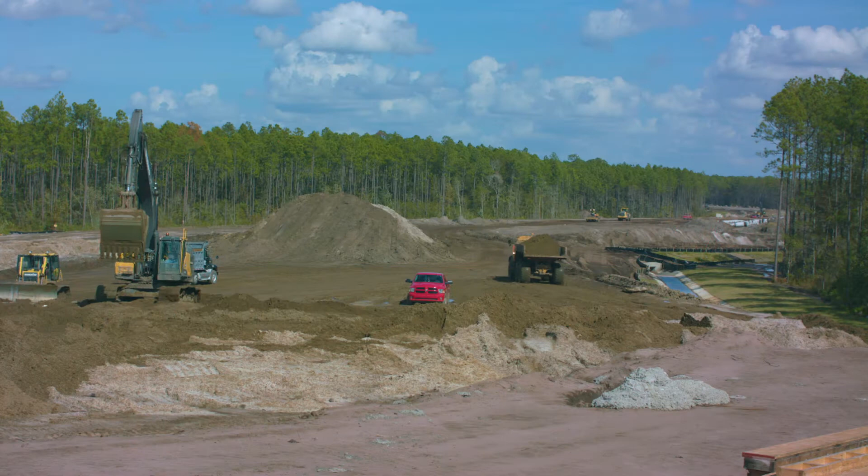By the time you're done watching this video, another 60 to 100 people in North America will have sustained an injury while on a construction site. Please pay attention and join us in keeping safety at Superior Number 1.

The Superior Construction family has worked hard to achieve our collective reputation. We're known for service, quality, and safety since 1938. Our commitment to safety is reflected in our safety performance. Despite our success in this area, we are intent on achieving our goal of zero incidents. Nobody wants to get injured, and most of the time we make good decisions, safe decisions. We take the time to plan the work and follow the rules. But sometimes we think we must rush the job or skip a step, and our behavior becomes risky.

Hello, my name is Nick Largura, 4th generation owner and Chief Executive Officer of Superior Construction. Everything we do, whatever your work involves, no one should ever get hurt. Our safety goal is zero incidents. Even one incident is too many.

Cultivated with more than 80 years of experience, our safety program helps provide the practices and procedures to help create a safe work environment for you and those around you. Safety is the job of each person working on behalf of Superior Construction. Together, with your commitment, we can help ensure that we all go home to our families safely. We must all work hard to achieve zero incidents.

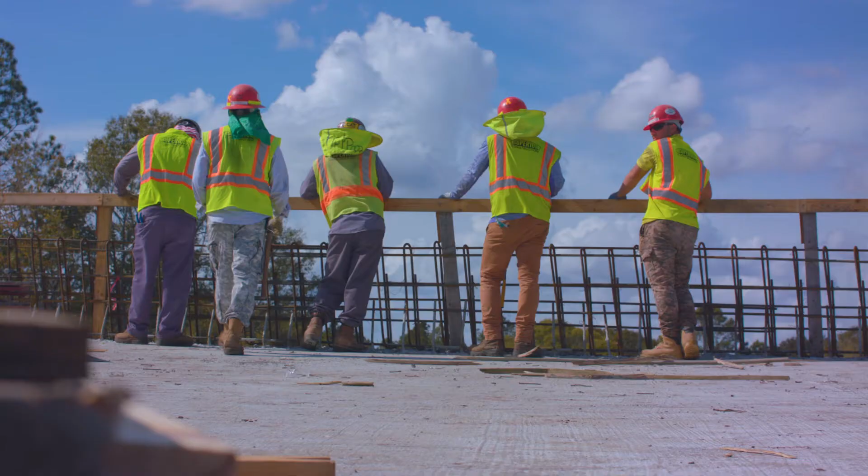Careful planning of your tasks is essential. But the most difficult part of incident prevention is making decisions protecting you and your fellow workers from harm. As your employer, we must comply with all safety regulations. We must maintain a safe and healthy workplace by identifying and controlling hazards and executing a well-documented HSE program.

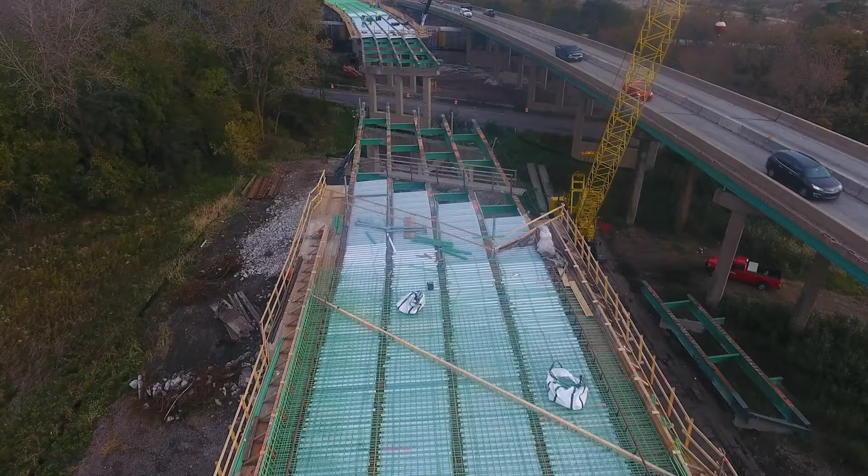As employees, you must comply with our HSE policies as dictated by legislation. You must always work safely, and you must report any unsafe acts or conditions so we can take corrective measures. We want you to know at Superior, safety is a core value, and it's everyone's responsibility. We have clear and specific HSE requirements you and your coworkers are expected to follow.

In this orientation session, you'll learn more about what you can expect and what's expected of you. If you have questions, we want you to feel comfortable speaking with one of our HSE professionals you see on site or your supervisor.

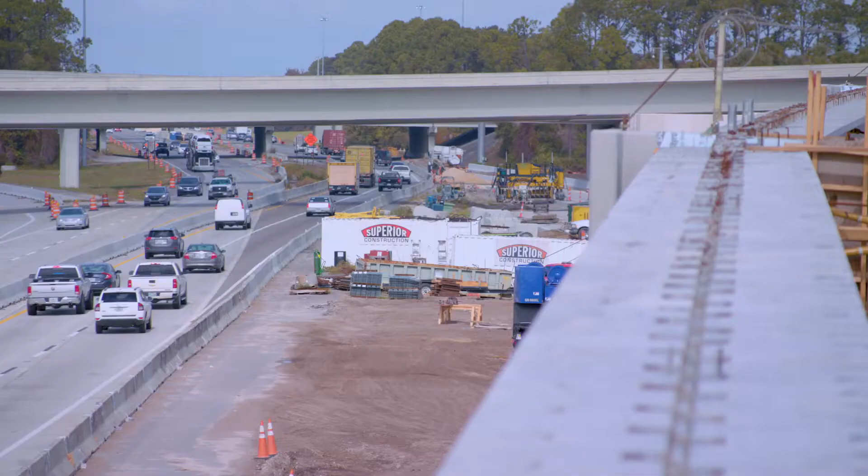As part of this orientation, we want to provide you with insight into our safety culture. It isn't a separate culture. It is the foundation of everything we do. Throughout your career with us, we want you to live our safety vision to make safety a part of your day-to-day interaction at work and home.

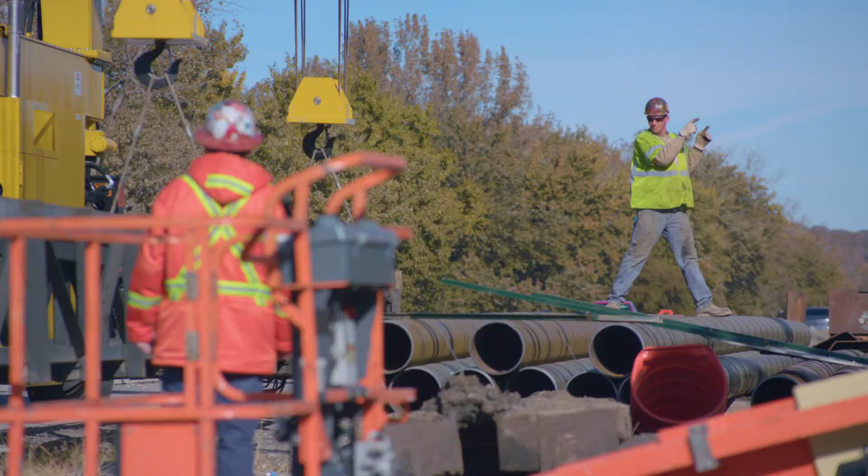We know there's a lot to learn about our safety program. To help you better, we've developed the Employee HSE Handbook. If you have a question about our safety policies or want to better understand our safety expectations, you'll find the answers in its pages. You're required to familiarize yourself with the handbook, then sign and return the acknowledgement sheet to your supervisor.

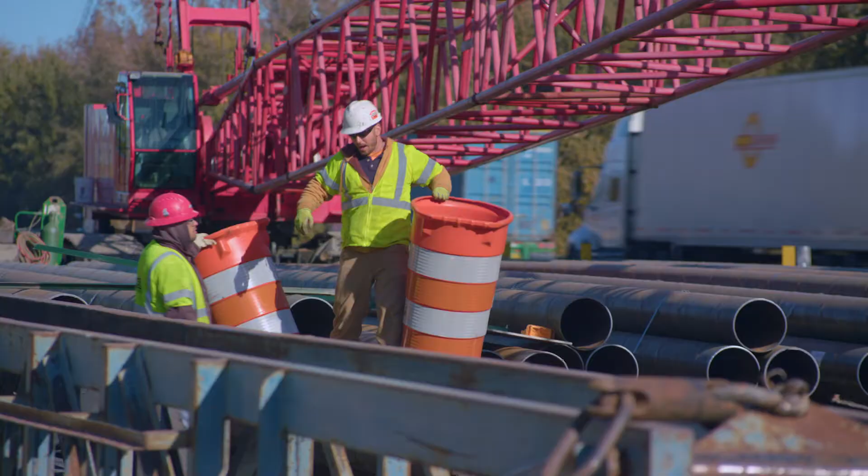All our safety resources are documented and are available to you in paper format at the job site or in electronic format. Some of these important documents include our corporate HSE vision statement, fall protection policy, HSE manual, and our HSE OPs. If you're in doubt about a safety practice, you can look it up in the handbook or consult your supervisor.

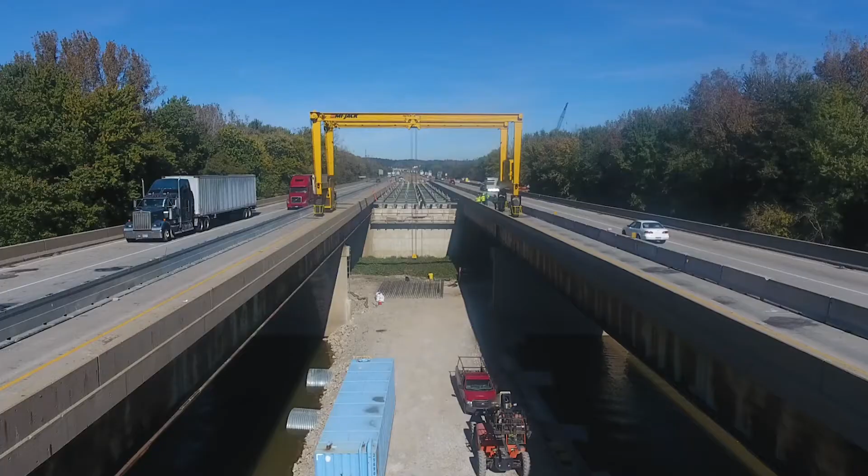Every employee has the right, even the obligation, to refuse a task if they think the task will place them in harm's way or is unsafe. Remember the first thing we talked about? Our expectation of zero incidents. If you think we don't have the right equipment, tools, or hazard controls planned into the task, stop and talk it over with your supervisor. Get the right stuff together and do the job safely. And don't forget to redo the THA to show the changes that were made to make the work safe.

In addition to Superior and our clients' policies, all governmental regulations must be followed. You can find these rules in the job site office. Workers must plan their work and comply with Superior, client, and governmental HSE standards.

If you or another employee don't follow the safety rules, disciplinary actions will be taken. That discipline may involve a verbal or written reprimand or removal from the job site, either temporarily or permanently. Superior reserves the right to terminate any employee on a single HSE infraction, with or without prior notice. Safety isn't optional. It is a condition of your employment.

Certain misconduct is designated as zero tolerance because it is so serious and potentially dangerous. The following violations are grounds for immediate termination: any criminal or illegal activities on the job site, possession and/or use of any illegal drugs or alcohol on the job site, possession of firearms or other weapons, any physical fighting or other acts of workplace violence, theft or attempted theft of property of any value, or vandalism.

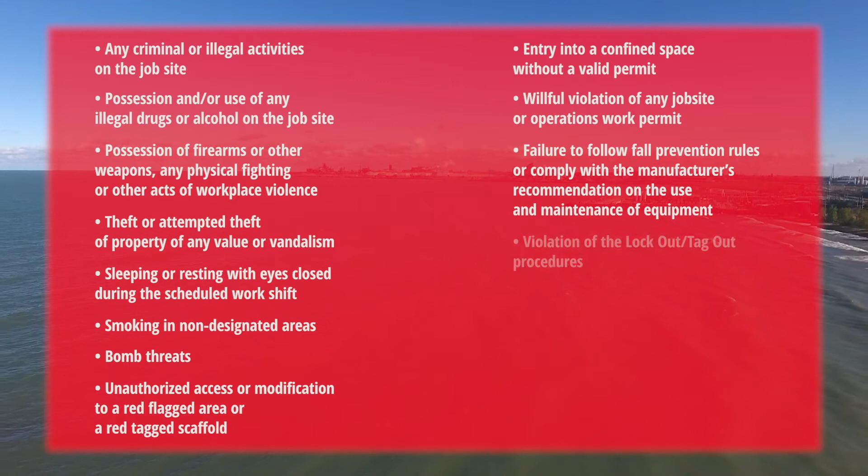Sleeping or resting with eyes closed during the scheduled work shift, smoking in non-designated areas, bomb threats, unauthorized access or modification to a red-flagged area or a red-tagged scaffold, entry into a confined space without a valid permit, willful violation of any job site or operations work permit, failure to follow fall prevention rules or comply with the manufacturer's recommendations on the use and maintenance of equipment, violation of lockout/tagout procedures, tampering with fire prevention equipment or client plant equipment, operating equipment without proper authority or qualifications, and failure to use sanitary facilities.

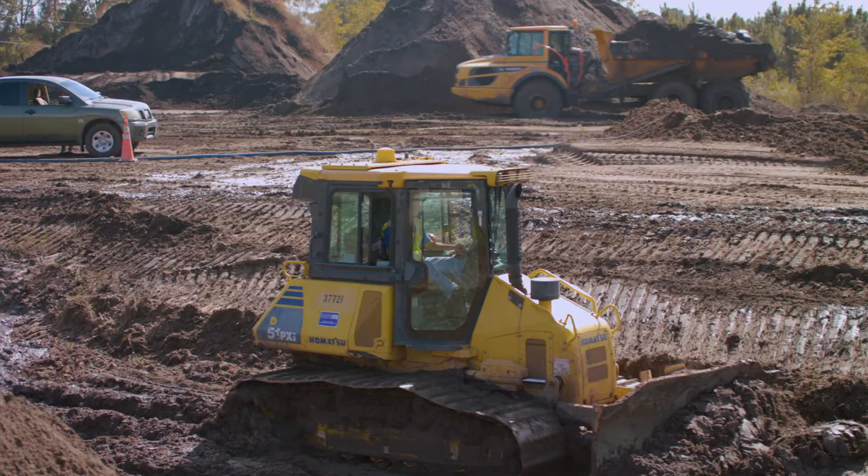Our substance abuse policy states the possession and use of illegal drugs and the misuse of legal drugs and controlled substances can have a serious impact on safety and will not be tolerated. Superior has zero tolerance for any use of illegal drugs and alcohol on our job sites. Also, you must use care when taking prescription drugs, as some could cause impairment. Please respect our rights in this regard and the rights of your colleagues to work in a safe and drug-free environment.

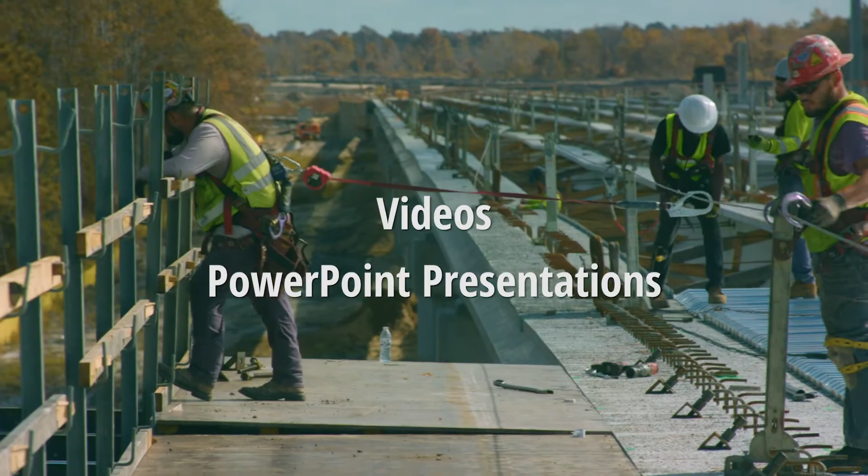We consider you to be an invaluable resource because you have first-hand knowledge of what's happening on a project. We want your feedback to improve our program. We conduct training wherever and whenever we need to. It can take place at the job site or in our local office, at the start of the day or at the end of the day. To conduct our training, we draw on several resources including videos and PowerPoint presentations. More importantly though, we rely on our own hands-on experience to bring the importance of safety home to you.

Our HSE field meetings are critical to the success of our safety plan. At Superior, you'll be required to attend weekly HSE meetings. On some job sites, daily HSE meetings are held. If for some reason you miss an HSE meeting, you'll need to review the content with your supervisor.

Being ready to work safe is more than just showing up on time and attending a safety meeting. It's also being physically ready to work. You need to warm your body up with stretching so you can reduce strains and sprains. Stretching prior to getting your day started is very important.

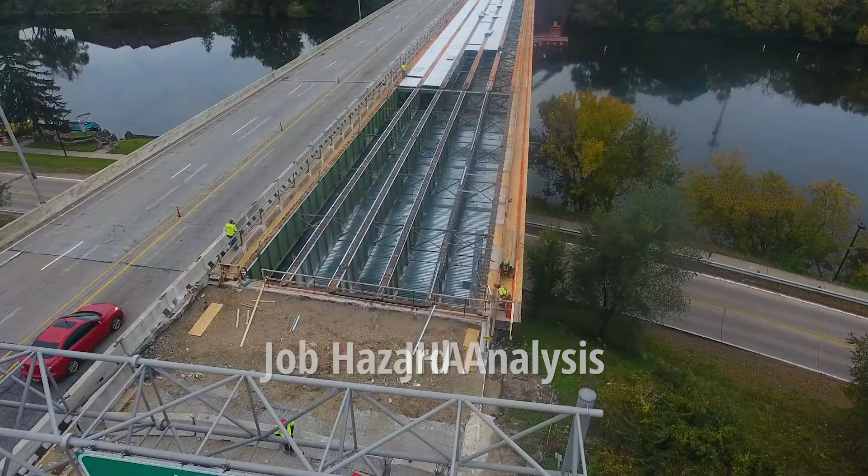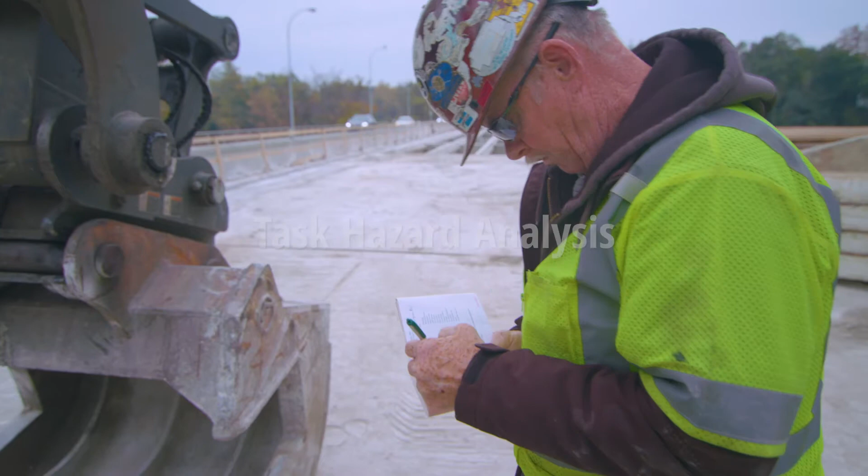On every Superior job site, we prepare a job hazard analysis, or JHA, to determine the risks of specific work tasks and take actions to modify the work or provide protective mechanisms reducing the risk. You, your coworkers, and supervisor must review and sign off on every JHA pertaining to your work and use it as a reference to do the task safely. Before you join your crew and begin work, meet with your foreman or supervisor and complete a task hazard analysis for your job.

Task hazard analysis, commonly referred to as THA, is a mandatory program designed to identify and control the hazards associated with job-related activities. Here's a THA book. The THA is an important activity because it helps you verify the working conditions. The THA is a pre-task planning tool designed to increase productivity and decrease the possibility of an incident. A THA can be conducted by a supervisor, designated work crews, crew members, and employees. The THA will help to recognize, eliminate, and control potential hazards.

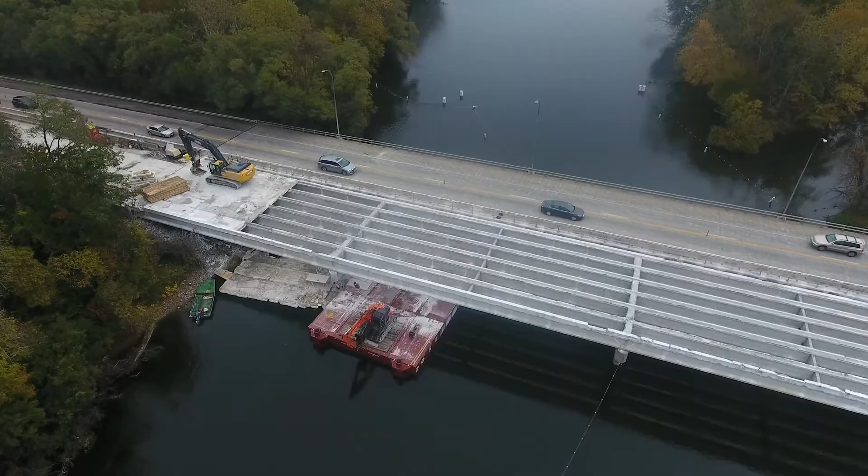Each worker must sign their THA when it's completed. Each crew must also complete a THA at the start of each shift, prior to any new job tasks, when new workers are assigned, when the information about the job changes, or when any job conditions change. The THA should be conducted in the location where the work will be performed. That way you can better assess the hazards and the controls.

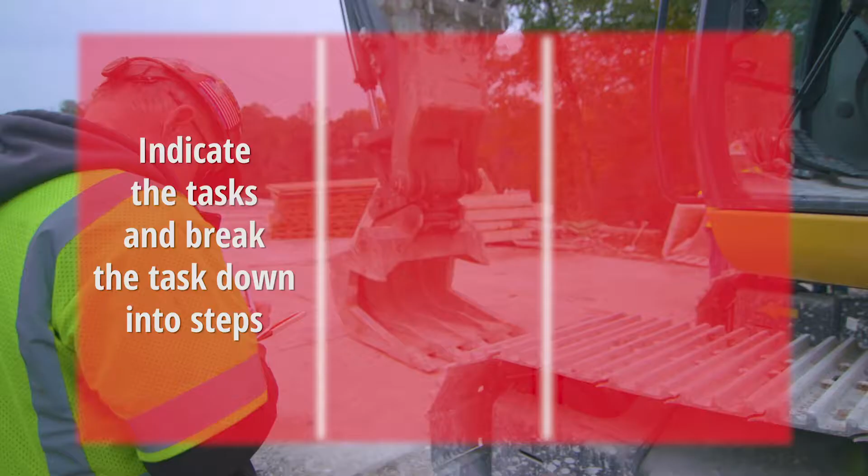Check off applicable hazards and other information as necessary. We only plan for one task per THA. If there's more than one task, do a THA for each task. Indicate the tasks and break the task down into steps in the first column. List the hazards in each step that could hurt you or a crew member in the second column. List the hazard controls to help prevent incidents in the third column.

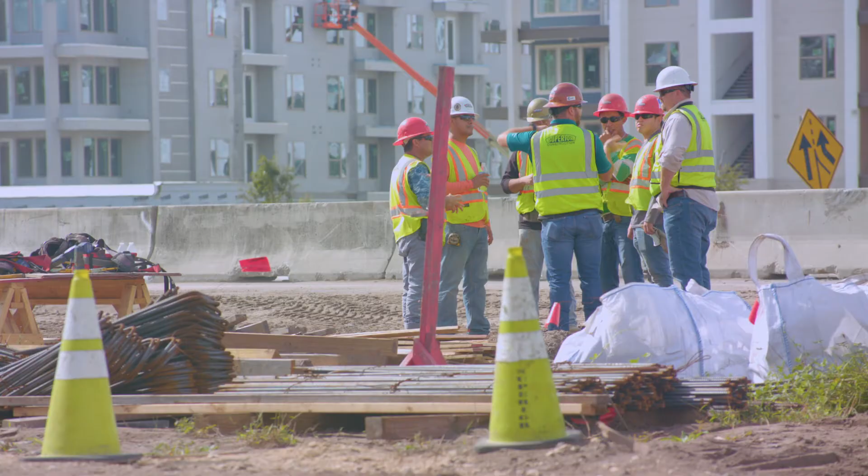All workers print and sign their names. Look around if other crews are doing work in the same area. Share your THA with those workers and look at their THA too. Review the THA after breaks and after lunch. The supervisor of the crew or superintendent signs off on the bottom of the THA.

A large measure of our regulatory responsibility in terms of safety lies in environmental protection. Consequently, the aim of our environmental policy is to minimize hazards to public health, protect the environment from the adverse effects of construction operations, comply with all legislated standards and regulations, assess potential environmental risks, evaluate and monitor environmental performance to applicable standards, work with industry, governments, and workers to enhance environmental awareness and maintain effective reporting.

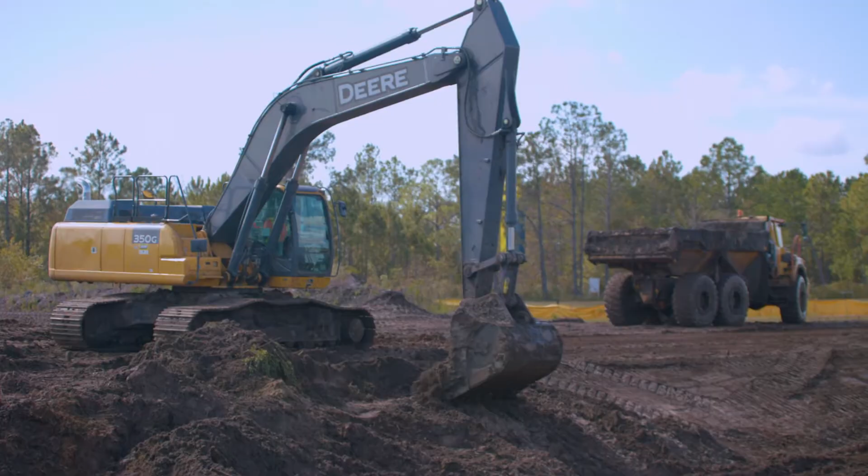The project-specific HSE plan will have specific procedures to help meet government requirements to limit our impact on the environment, including procedures for handling chemical spills, procedures to control erosion from job site rainwater runoff, as well as dust control and procedures for handling contaminated soil or groundwater. We expect all our employees to treat the environment with respect for the safety of our generation and for generations to follow.

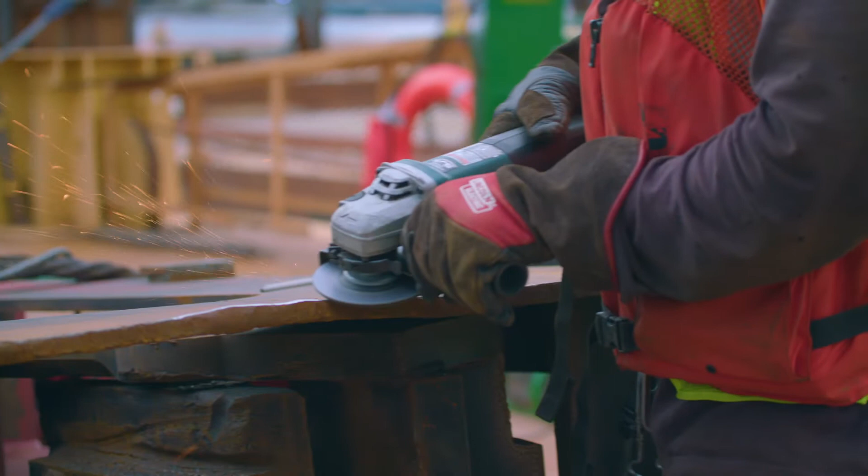While we make every effort to work safely, inevitably objects do fall and fly. Grinding, sawing, concrete chipping, chemical mixing, welding, and burning are a fact of life in the construction industry. Please do not attempt any of these tasks without effective face and eye protection. Whether it's safety glasses or goggles, face shield or welding mask, ensure your work clothes cover your entire body, especially your arms and legs, to prevent exposure to skin irritants, flash burns, cuts, or scrapes.

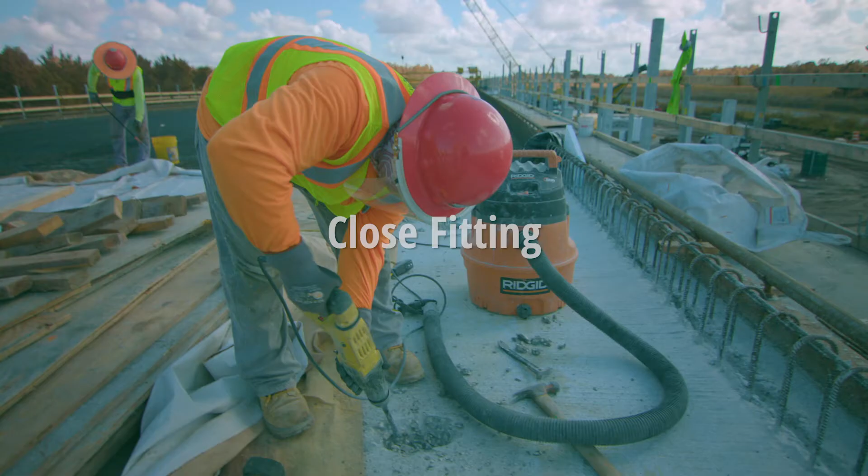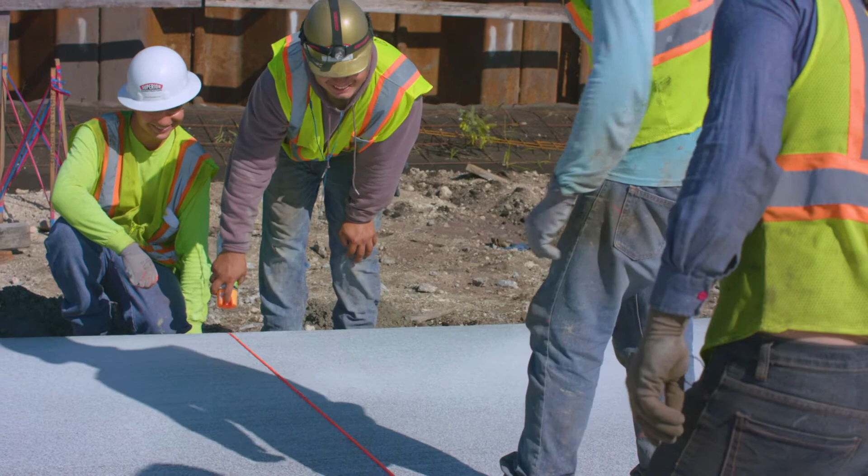We also ask that you wear work clothes that are close-fitting. If your clothes are loose-fitting, it may be a hazard to you, especially when you're working around moving machines or power tools. Some working conditions also require you to wear protective gloves, suits, or boots, for example when you're working around hot liquids, acids, caustics, or toxic substances such as benzene or lead. If we ask you to help with these materials, we'll provide you with specialized clothing for the task.

As a minimum, all workers on a Superior job site must wear PPE, including head protection, eye protection with side shields, foot protection, and you must also have hand protection on your person. Your job site may have additional PPE requirements, so be sure to ask your supervisor. Additional PPE may be things like fall protection, hearing protection, full face protection, fire-resistant clothing, reflective vests, or respiratory protection.

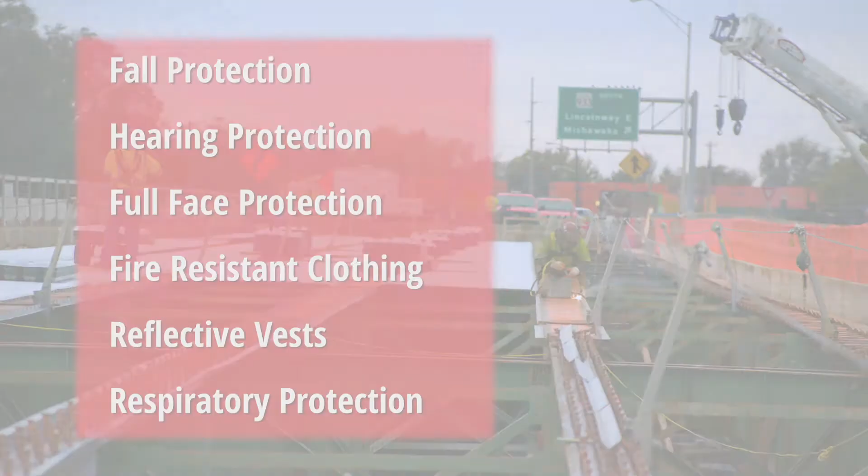Without proper footwear that is in good condition, you're at risk. Proper footwear will protect you if you step on a sharp object, lose your footing on uneven ground, or drop a tool or material. You must wear the appropriate footwear as dictated by the project-specific HSE plan.

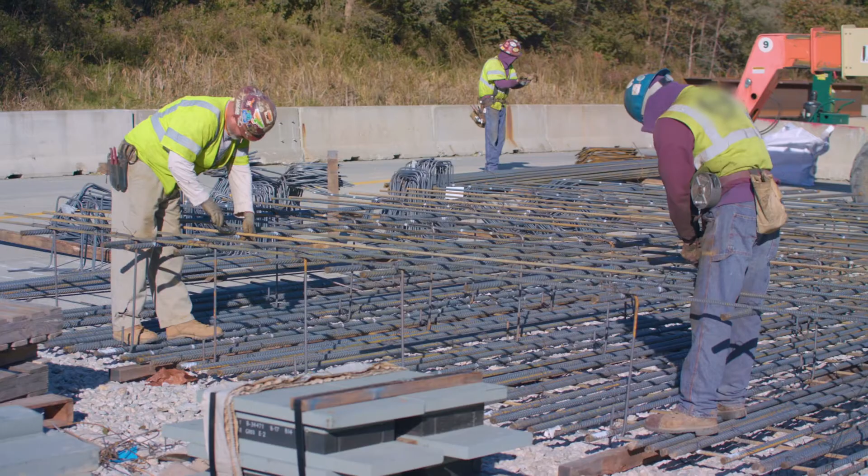All too common and all too preventable are hand injuries. In construction, hands and fingers are injured more often than any other body part. We ask that you wear work gloves whenever you're performing work to protect you from minor cuts and abrasions. In fact, hand protection is so important to us, we provide you with work gloves on our projects. Many of the hand and finger injuries result from pinch points that cause fractures or lacerations. It is important you keep your hands and fingers out of places where they could be pinched, crushed, or bruised. Keep your mind on your work and know where your hands are. Sounds a bit obvious, but it's really important.

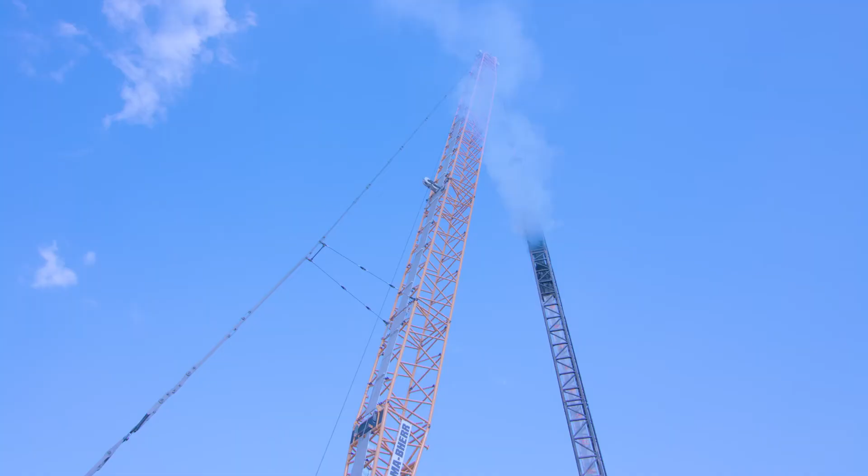Remember, you must wear hearing protection whenever the noise is louder than 85 decibels. There are lots of different things on a job site that exceed 85 decibels. You can tell if the noise is above 85 decibels when you need to raise your voice to be heard if you're at an arm's length from the person you're speaking with.

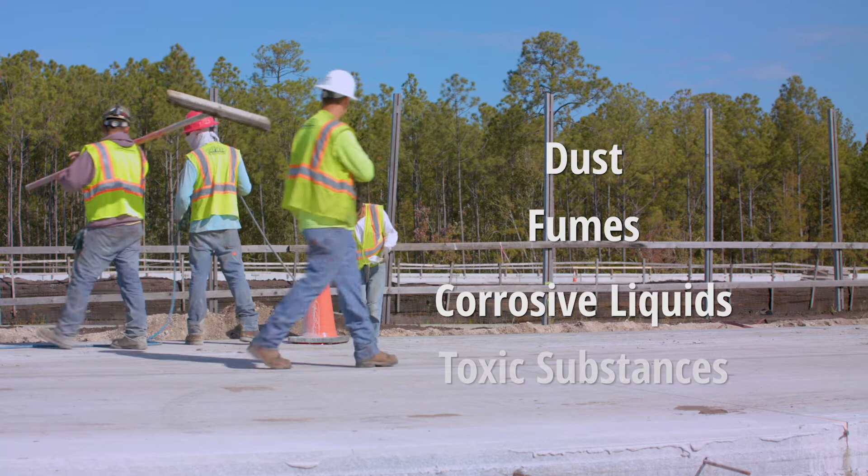When working in oxygen-deficient atmosphere or where dust, fumes, corrosive liquids, and toxic substances are present, protect yourself by wearing the proper respiratory equipment. Respiratory devices vary in design, application, and protective capability. Check with your supervisor to ensure you're using the appropriate protection.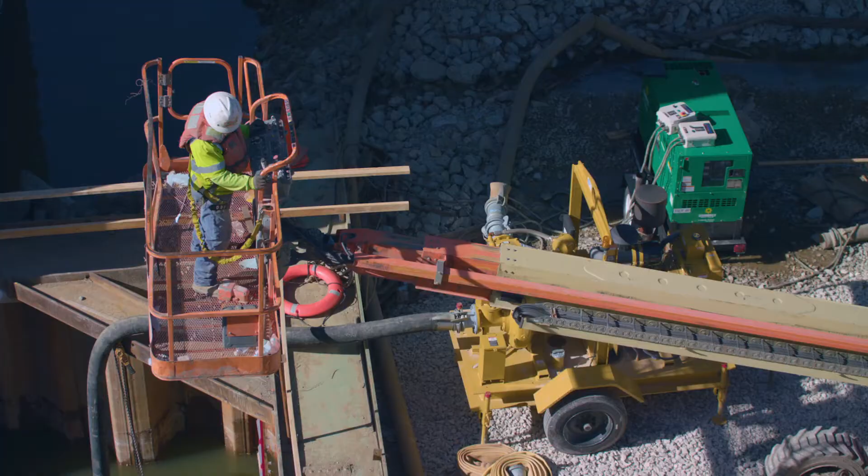By law, we are required to develop a fall protection and prevention plan for each project we undertake. Whenever your job requires you to work at heights, please refer to your site-specific fall protection and prevention plan before you start work, and learn more about the procedures you must follow to stay safe.

Before you start any work requiring fall protection, you must check with your supervisor for details of the fall protection plan for your task. Superior requires fall protection at 6 feet and above. Some client or regulatory requirements may be more restrictive. Ask your supervisor for details.

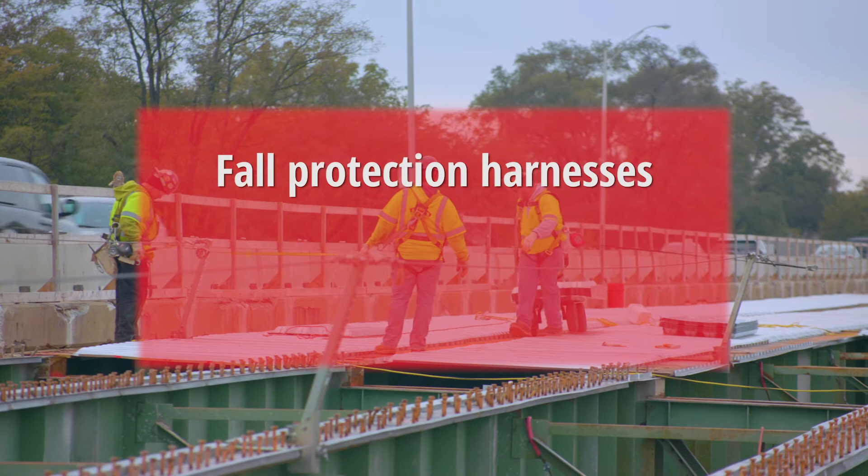Fall protection can be achieved on a job site by constructing guardrails or limiting access to platforms or leading edges. When this is not feasible, fall protection harnesses and lanyards secured to an approved anchor point must be used. Superior requires 100% fall protection, so you'll be required to wear a double lanyard. This allows you to disconnect one lanyard while transitioning to the other location and to remain 100% connected.

When you do your THA, your supervisor will help you determine the fall protection requirements and anchor points.

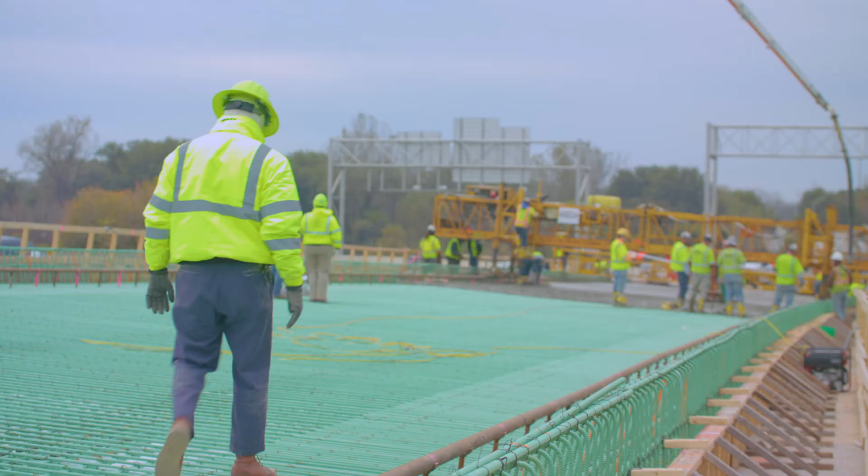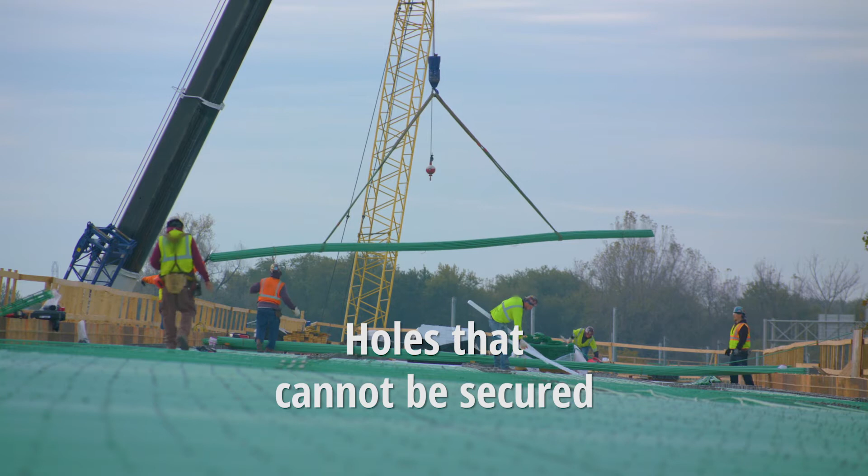An important part of being safe at work is knowing how and when to use guardrails and how to stay safe when there are holes in the walking surface. A guardrail system should be used whenever there are holes that cannot otherwise be secured, and on unprotected sides of decks, excavations, and other elevated surfaces.

All guardrail systems must consist of top rails, mid rails, and toe boards. Top rails must be 42 inches high, plus or minus 3 inches. If a guardrail needs to be removed to allow access for work, you must get approval from your supervisor before removing it. Once you have permission, always follow the procedures outlined in the project's specific fall protection plan for guardrail removal.

Openings are sometimes required during the construction process for everything from pipe chases to blockouts. Floor openings or holes are defined as a gap or void 2 inches or more in its least dimension in a floor, a roof, or other walking or working surface. All such holes must be properly guarded.

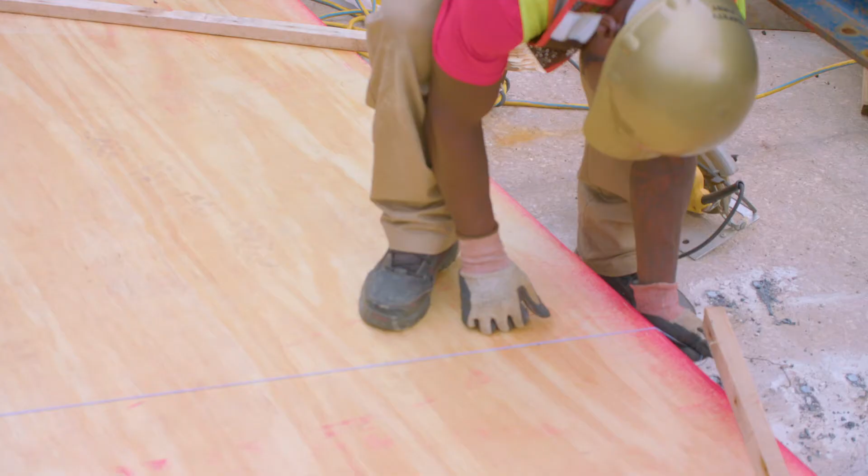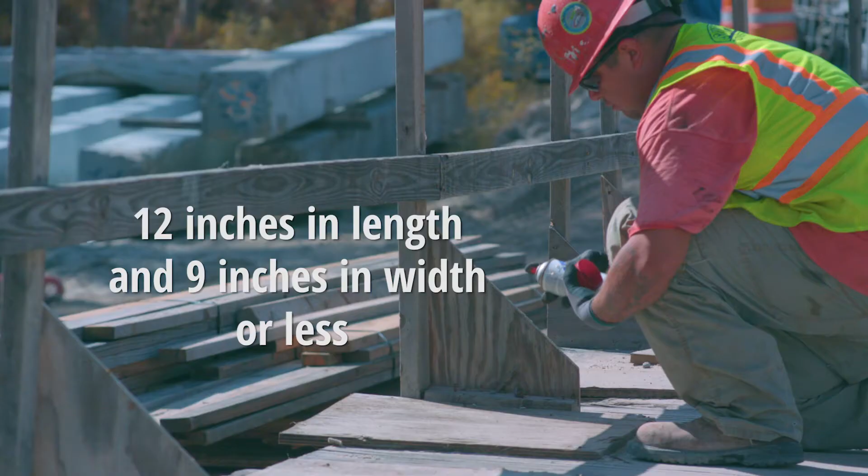Holes must be covered and covers secured to prevent accidental displacement. Covers must withstand at least twice the anticipated load. All hole covers 12 inches in length and 9 inches in width or less will be marked with a circle with a cross through it. All floor hole covers greater than 12 inches in length and 9 inches in width or diameter must be identified with a sign reading 'Hole cover, do not remove' and marked with a circle with a cross through it. If the opening or hole is too large to be covered, a guardrail system must be used.

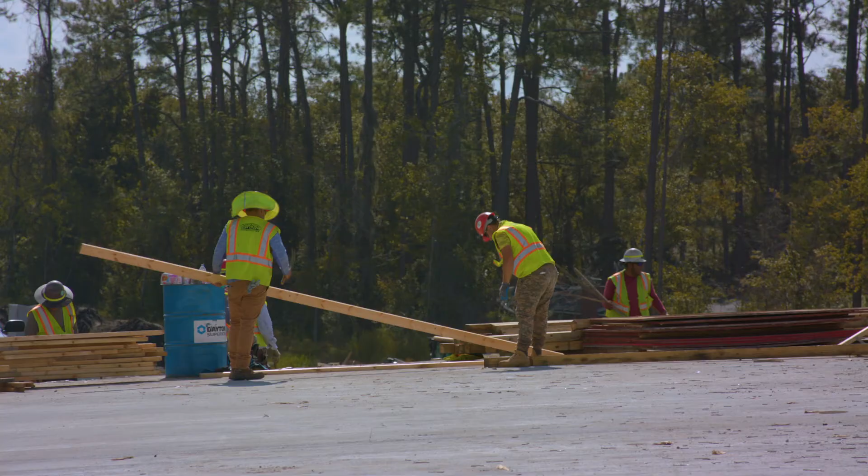There could be congestion in your work location resulting from many workers in the same small areas and/or stored materials, causing crowded conditions. Make sure you assess the hazards of congestion when completing the THA and take corrective action as needed. Be sure to thoroughly communicate with nearby crews to reduce the hazards of working in close proximity. Remember to review other crews' THAs to understand their work and hazards.

As you will see, there are a lot of signs throughout the job site, and they all have extremely important messages on them. These signs are important communication tools, telling each employee about potential hazards. They communicate information like PPE requirements, emergency contact numbers, restricted areas, confined spaces, muster points, and working conditions. It's everyone's responsibility to stay well informed.

If you are working over areas that are accessible to workers, it is your responsibility to make sure the area beneath is defined and barricaded.

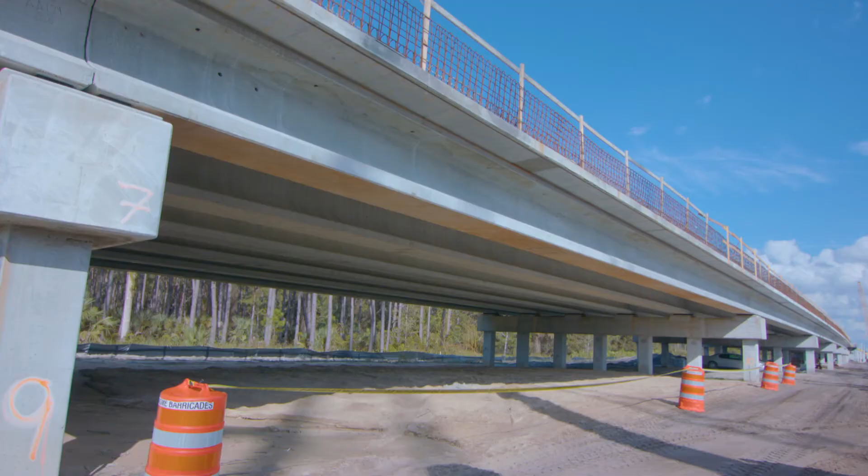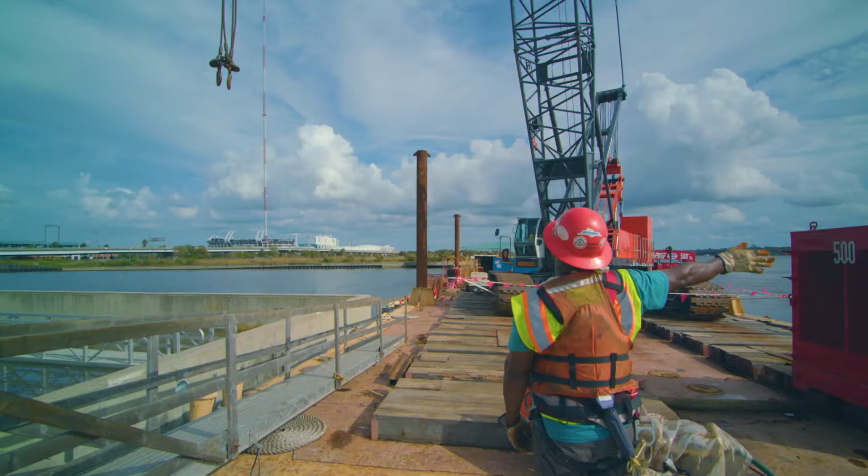Along with signs, we also use yellow caution and red danger tape to create warning lines to warn workers to be alert for hazards. The yellow caution tape is used to warn workers there is some serious activity in the area. Before they enter, they need to identify the hazardous activity and then look around to see if it is safe to enter. Red danger tape indicates a much more severe danger than yellow caution tape. The red danger tape is used when the activity in the area could severely injure or kill you.

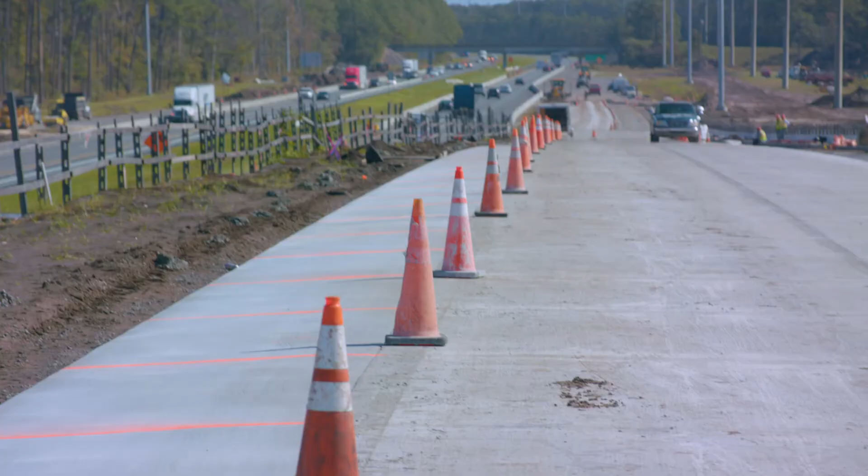Do not enter - the red danger tape is used to warn you to stay out. If you absolutely must go into the red taped off area, you must get permission before you enter. Remember, if you put the barricade tape up, you also take the barricade tape down when there is no longer any need for it. Some job sites may have different procedures, so please check with your supervisor for details.

On occasion, you may be asked to work with a chemical. If you're not familiar with the chemical, ask your supervisor for the Safety Data Sheet, or SDS, before you begin work. SDSs are available in the job site office. An SDS is a safety-oriented fact sheet for a chemical, telling you everything you need to know to work safely with that product. This is all critical information when handling chemicals.

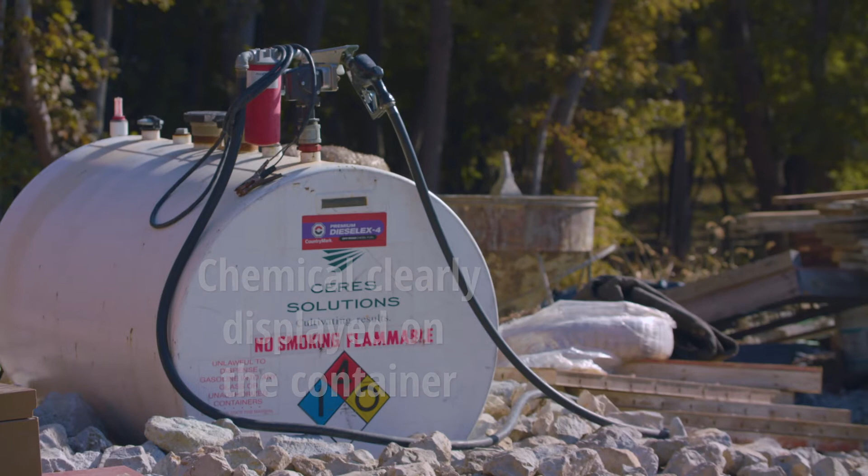If you put chemicals in a container to use on the job, that container must have the chemical clearly displayed on it. All harmful gases need to be handled and stored properly. Every job site has different detailed procedures depending upon the gases stored and used on that job site. Ask your supervisor to explain the procedures on this job site.

Our comprehensive ladder and scaffold safety program outlines our standards for safely erecting ladders and building scaffolds. Some job sites have different rules for the use of ladders. Some job sites don't allow ladders to be used at all, while others require permits and fall protection plans. Check with your supervisor for the ladder rules on your job site.

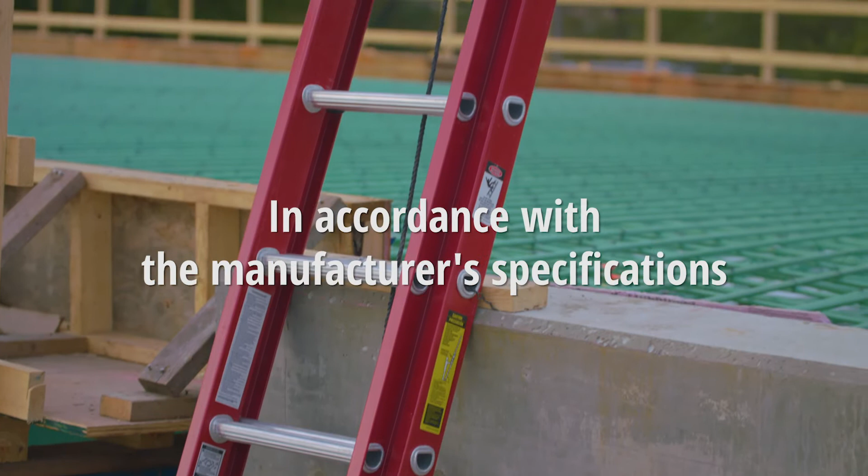If ladders can be used on your job site, make sure you always use them in accordance with the manufacturer's specifications. Additionally, keep the following in mind: pick the right ladder for the job, always make sure the base of the ladder is level and secure, make sure there's no debris around the base of the ladder, and inspect all ladders for defects before use.

Do not paint any ladders. Do not work off the top 2 rungs or paint shelf. Only carry material in tool belts or suspended by ropes in buckets or similar containers. Keep both hands free for climbing and descending. Always face the ladder and keep 3-point contact when climbing or descending. Do not reach out too far. Keep your belt buckle inside the rails to maintain your balance.

For extension ladders, the ladder should extend 3 feet above the landing point if using the ladder to climb to a higher level. The ladder must be properly secured so it cannot slide or fall. Tie it off at the top and have a coworker hold it or cleat it at the bottom. The angle of the ladder should be set so for every 4 vertical feet the ladder is 1 foot out from the wall.

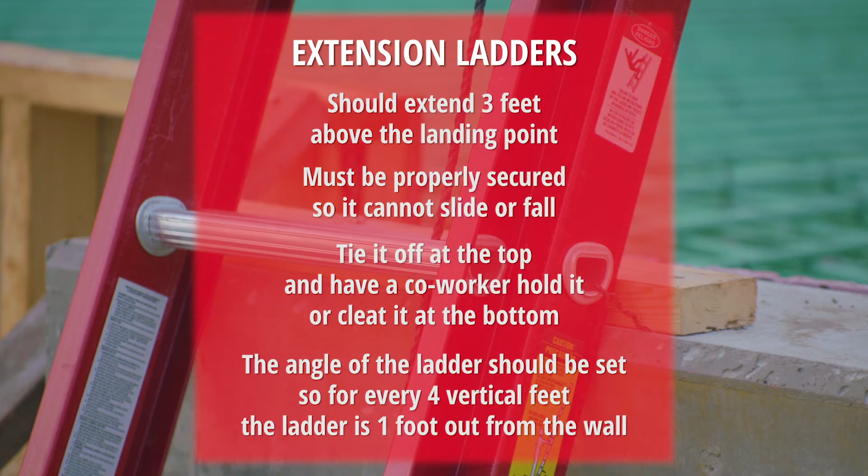For step ladders, fully open the ladder. Make sure the spreader arms are locked. Only stand on the step side of the ladder. Use your hands to support yourself and help with balance. Never climb on a folded step ladder propped against a wall or other surface.

If you need scaffolding to perform your work, you must obtain permission and proper instructions from your supervisor before erecting it. Please note, scaffolding should be erected and dismantled by competent workers. Scaffolds are designed to provide safe, secure, elevated work platforms for workers and materials.

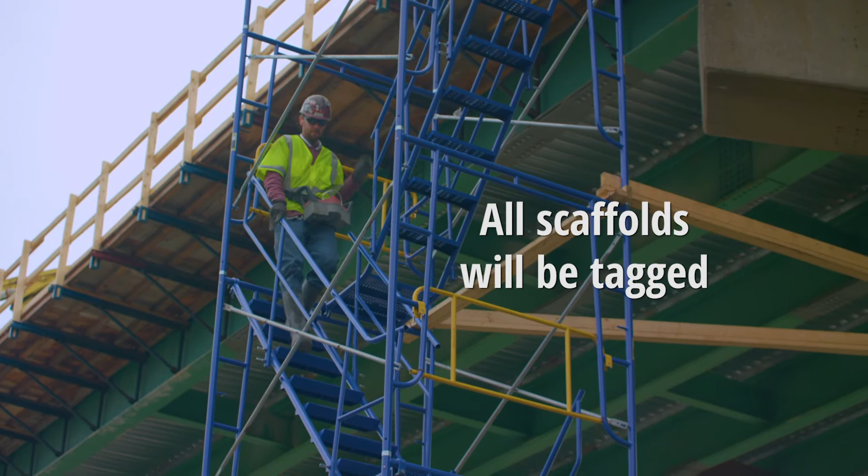Scaffolds will be inspected at the start of each work shift. All scaffolds will be tagged. The tag should be located at the ladder or stair access and will show the date of the last inspection. If the scaffold hasn't been inspected at the beginning of the shift or the tag is missing, don't use the scaffold. Tell your supervisor and he or she will get it inspected.

The color codes for the tags can be compared to traffic lights. A green tag means the scaffold meets all requirements for safe use. In most cases, you can work on a scaffold with a green tag without a fall protection harness.

A yellow tag indicates the scaffold may be obstructed or partially complete, but can still be used with caution as identified by information on the back of the tag. This usually means a fall protection harness is required to be worn and used when you're on the scaffold. A red tag means the scaffold is under construction or being dismantled and should not be used.

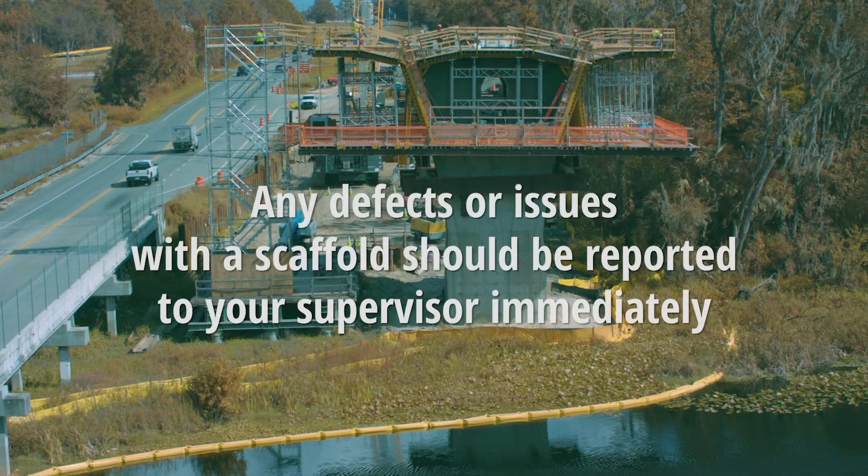Any defects or issues with a scaffold should be reported to your supervisor immediately. Do not use any scaffold you feel is unsafe. When working from scaffolding, workers must climb the scaffold using the ladder or stairway provided and never climb on the braces. Understand the nature of any electrical, fall, and falling object hazards in the work area.

There may be additional procedures and guidelines for safe erection, use, and dismantling of scaffolding on your job site. Check with your supervisor for details.

Confined spaces pose a threat to the health and safety of anyone who enters it. That's why we've developed a confined space program. If you are authorized to enter a confined space, you must receive specific instructions and training prior to entry. Also, please review the safety procedures associated with this program. If you're unsure if it is a confined space, please contact your supervisor before you enter.

Whether you're digging a large open excavation or a narrow trench, you need to be familiar with possible hazards. Our trenching and excavation program will help increase your awareness of the risk associated with these work situations. You need to recognize and address any environmental conditions indicating a hazard such as water level or bulging wall. You also need to know what's under the surface.

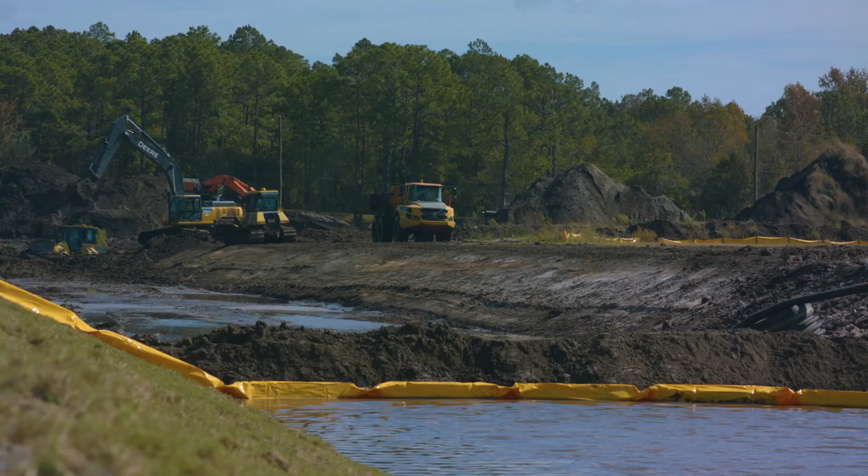Supervisors will have reviewed utility plot plans and talked to utility providers to understand the locations prior to digging. But make sure you use appropriate methods to locate and stay well clear of utility lines. Check with your supervisor and always complete the excavation permit before digging. Don't forget to look overhead, as electrical and phone lines can be struck by equipment if precautions are not taken.

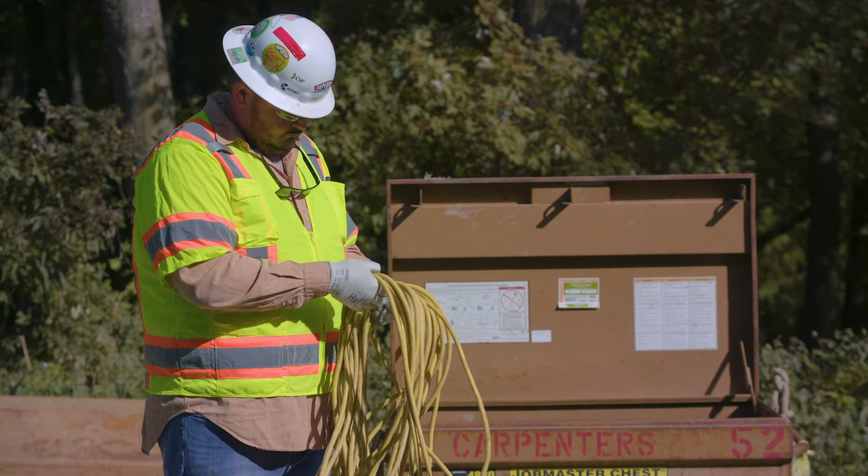You need to know in construction, electrocutions are the second leading cause of fatal injuries after falls from height. Your safety depends on your due diligence in eliminating electrical hazards before you start your task.

Always inspect electrical cords and plugs. If the insulation is worn or the ground plug is missing, take the cord out of service. Never try to fix or create a shortcut for malfunctioning electrical equipment. Return it to your supervisor, who will arrange for its repair by a qualified person.

Also, as part of your work, install ground fault interrupters or GFIs and implement an assured grounding program. Before starting work on energized equipment, lock out the sources of energy.

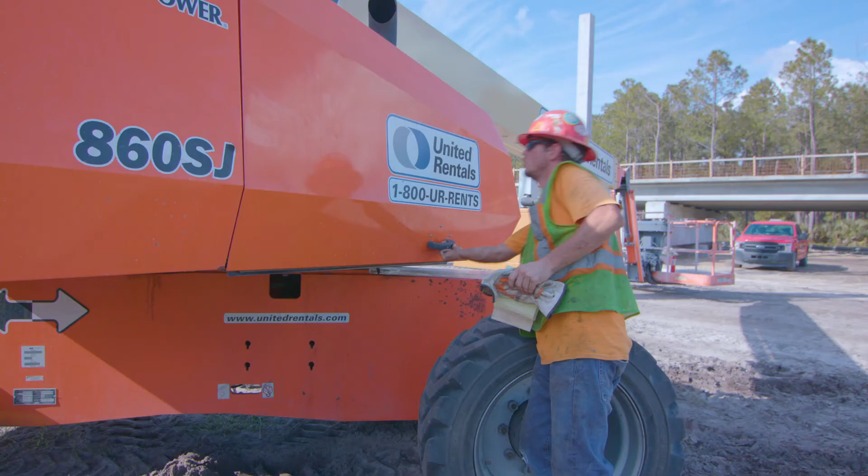The superior HSE operating procedure entitled Control of Hazardous Energy must be reviewed and fully understood before lockout procedures are implemented. Your supervisor will help get you access to this operating procedure and the specific procedure having been written for lockout of an individual piece of equipment.

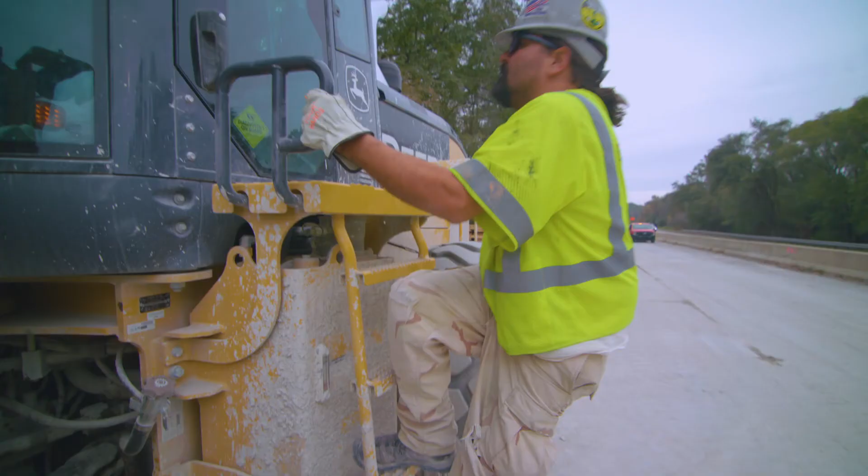The heavy nature of construction materials sometimes requires the use of mechanical hoisting equipment, such as cranes and forklifts. Only qualified personnel may operate equipment or provide hand signals for providing lifts. If signaling is your responsibility, please maintain clear communication with the operator and use taglines to control the load.

There are several brands of aerial lifts we use, and all require you to be trained. Before using an aerial lift, complete the daily use inspection checklist. Never operate an aerial lift having mechanical deficiencies. And always wear fall protection harnesses and lanyards.

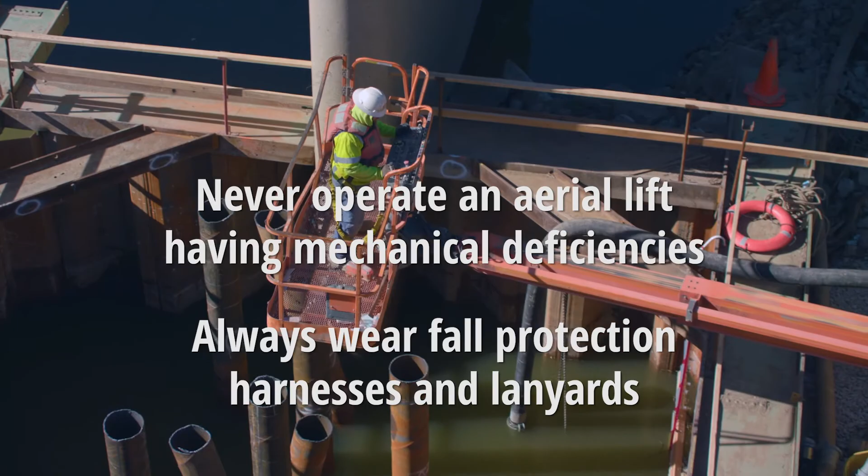Be aware of job site traffic control plans and traffic patterns, and know the parking rules and entry points. Be especially cautious around congested areas where there is a lot of traffic. Additionally, all property damage incidents, including damage to vehicles, equipment, and structures, must be reported to your supervisor. If you have questions, ask your supervisor.

Demolition work has several unique safety and environmental risks. The demolition checklist must be completed and a thorough THA done to make sure the hazards are controlled. If your tasks involve demolition, additional training may be provided. Underground utilities such as electrical, gas, and water lines can be hazardous.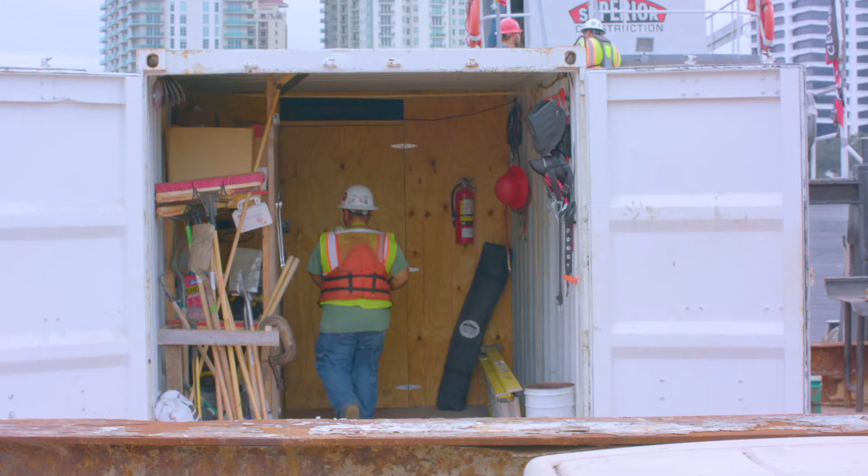On a construction site, you'll use many tools to perform your work. All tools must be inspected before use. Keep your tools in good condition. It's your responsibility to take care of tools and report frayed electrical cords and other deficiencies. If damaged, tag immediately for repair or replacement and notify your supervisor.

Use the right tool for the job. Do not add extension, cheaters, or makeshift devices. They will only increase your risk of injury. Guards on tools are there for your protection. Use them. Of course, you should never use a tool unless trained in its safe use and you're authorized to use it. Some tools, such as grinders, can be very dangerous if mishandled.

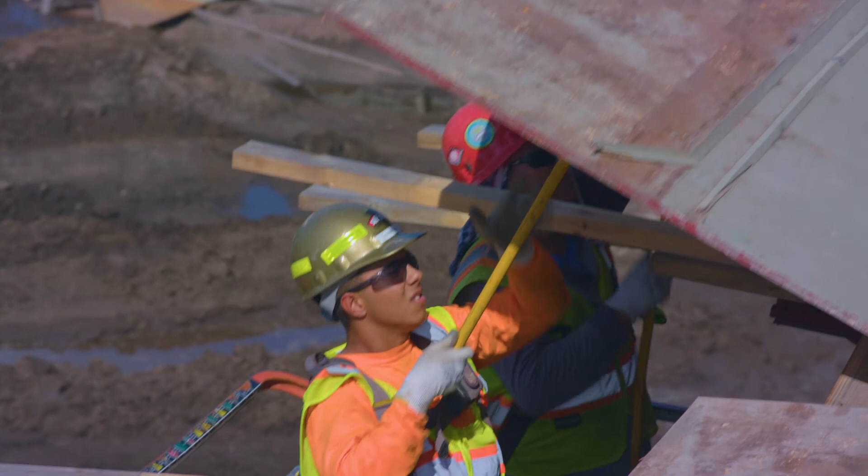Material handling is something we all do daily as part of our work. It's important to lift materials properly to prevent strains, sprains, and other injuries. Before you lift and move any material, take a minute to assess the situation.

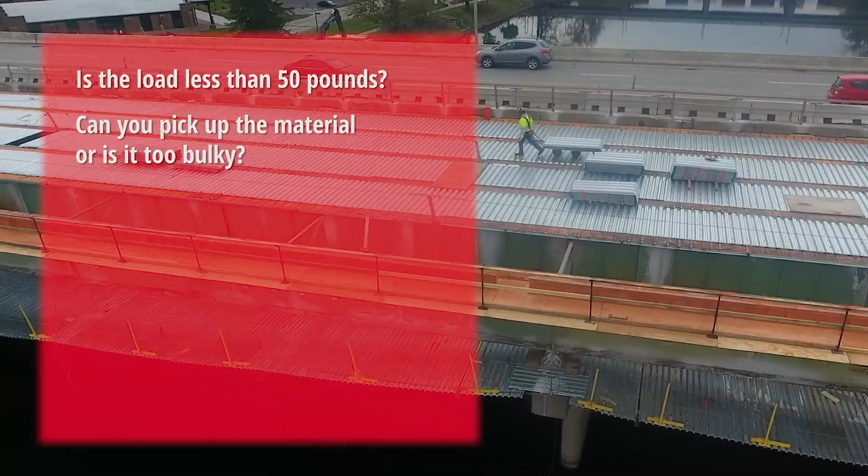Consider the following. Is the load less than 50 pounds? If not, get help. Can you pick up the material, or is it too bulky? Is there a clear walking path where you will carry the material? Check the destination. Can you set it down without pinching your fingers? Will dunnage be required to support the material?

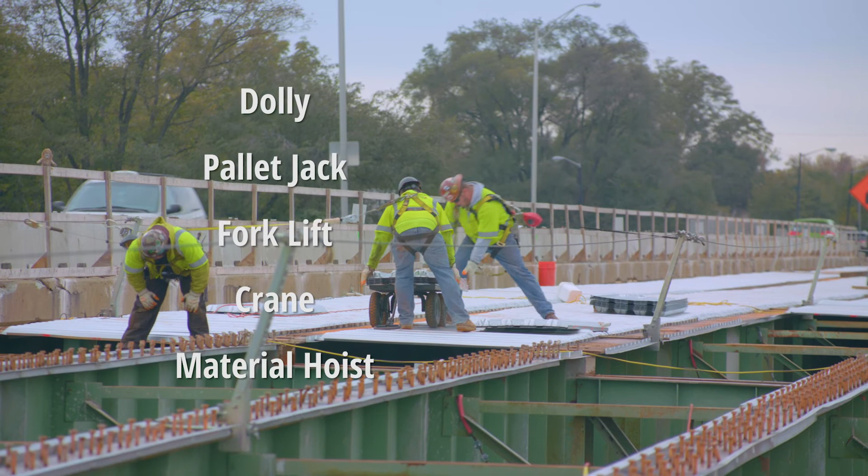Once you've completed the assessment for the lift, you can proceed. If the load is too big, heavy, or awkward, use a mechanical device such as a dolly, a pallet jack, the forklift, crane, or material hoist. Any mechanical lifting device must be operated by a trained and certified operator.

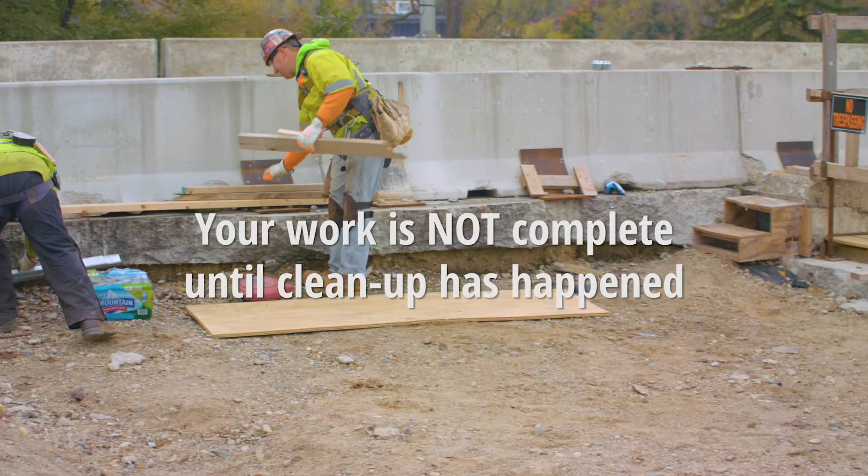It's easy to overlook this step or treat it as secondary, but your daily work routine must include time for housekeeping. Please note, your work is not complete until cleanup has happened. Make time throughout the day to pick up scraps and remove and discard waste into the designated areas. Properly store construction materials and band or secure stacked material so it can't blow around in the wind or fall onto someone.

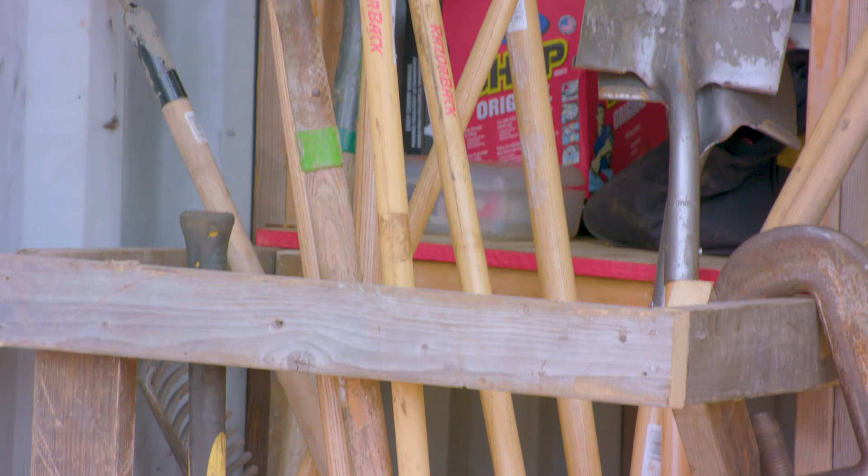Keep cords, welding leads, and air hoses out of walkways and nearby work areas. Be sure tools are properly stored and organized so you can quickly and easily find what you need. These housekeeping guidelines go a long way towards minimizing hazards and maximizing everyone's efficiency and productivity.

There are some basic items you should know about fire prevention, including where the fire extinguishers are located, the types and capabilities of these fire extinguishers, proper operation of the fire extinguishers, and the emergency evacuation routes and assembly areas. You must know the emergency response procedures you're to follow in the event of a fire. Always be aware of your escape routes and know where your muster area is located.

Although no one can predict how or when an emergency will occur, we can plan our response. That's why we create an emergency plan for each project. As part of your site-specific orientation, your supervisor will review this plan with you. Being totally familiar with the plan will benefit you and your coworkers should you find yourself in an emergency.

Every job site has a project-specific emergency response plan for spills that can be found in the project-specific HSE plan. If you see a spill, notify your supervisor immediately. If it's safe for you to help control the spill, you may, for example, drop some absorbent barriers to keep it from entering a storm drain. Your supervisor will make sure the job site spill kit is used to properly control the spill, and experts will be called in to clean it up.

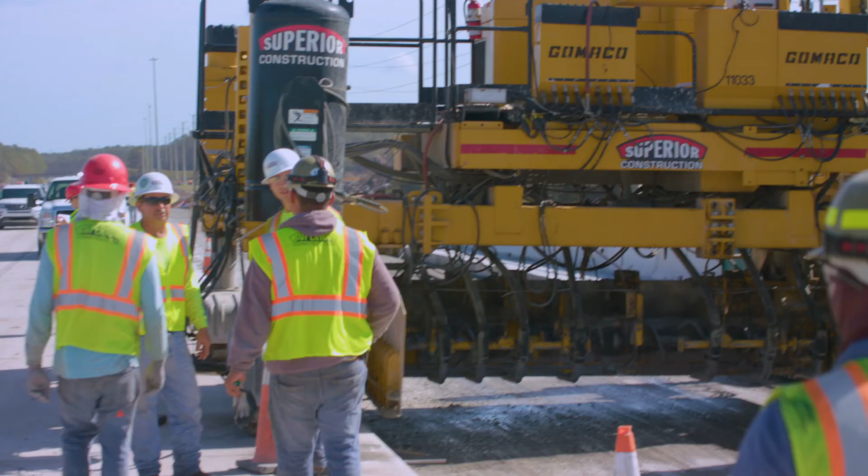The job site plot plan shows the locations of subcontractor offices, muster points, gate numbers, loading zones, first aid stations, fire extinguishers, and spill kit locations. Your supervisor will show you where your evacuation muster area is located. Each time you do a THA, the muster area must be included. If an alarm is sounded, go to the muster area and report to your supervisor. Stay in the muster area until your supervisor gives you the okay to leave. Remember to always check with your supervisor or any job site staff member for details.

Our goal of zero incidents includes preventing not just injuries, but also near misses. To reach our goal of zero incidents, we must be vigilant in identifying any potential or existing hazards. You may do so through our near miss program. A near miss is an event not resulting in injury or damage, but had the potential to.

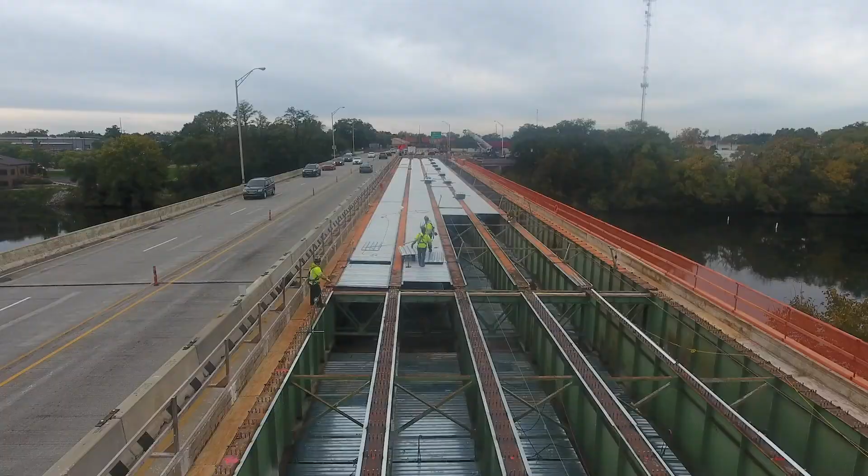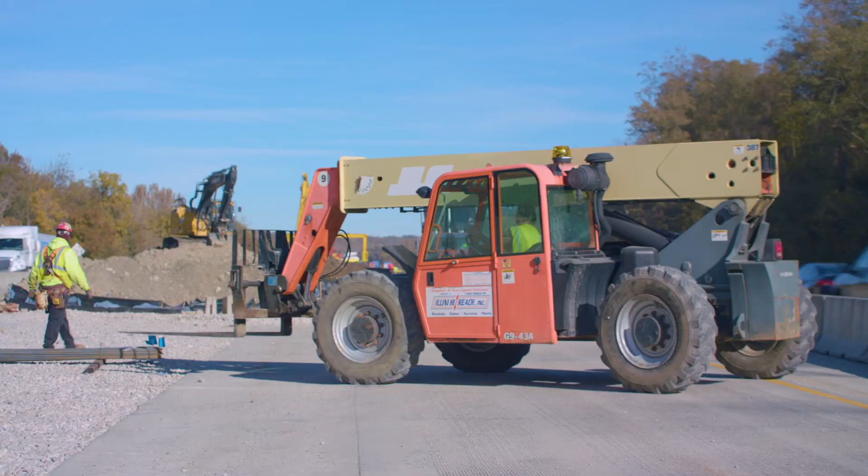For example, say an iron worker dropped a spud wrench, hitting the ground but doesn't hit anyone or cause any damage. We investigate these incidents and record the details so we can prevent the incident from happening again. We want to fix any problem leading to a near-miss incident. Reporting a near-miss will help your supervisor implement the measures required to prevent future incidents. First, we must know about them. It's your responsibility to report all near misses to your supervisor.

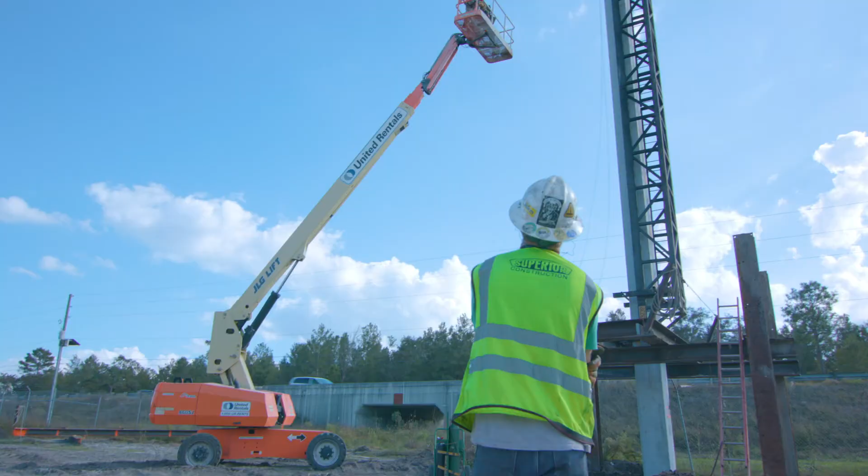Incident investigation is an important part of our strategy to prevent injuries. It allows us to identify the factors which preceded and contributed to an incident, and to implement the corrective measure to prevent it from occurring again. We are all responsible for doing what we can to prevent injuries or to prevent further injuries. If you witness an incident, we'll need your full cooperation and input during our investigation to improve our overall safety operations.

If an injury does occur, you must report it to your supervisor immediately. Whether you are involved or not, we ask all employees to seek medical attention even for minor injuries. To this end, we offer first aid on all job sites. Depending on the severity of the injury, we will escort you to the nearest off-site healthcare facility for treatment if necessary.

Superior has a modified work program. If you require treatment from a doctor, he or she will provide you with a report describing any restricted activity preventing you from doing your regular work. This report needs to be given to your supervisor. Each time you go back to the doctor, you'll get a new report. Always provide this report to your supervisor.

On every job site here at Superior, our goal is to make sure each worker goes home every day as healthy as they came to work. We are fully committed to your well-being on this job site, and we will help you work safely. Likewise, we expect you to have a commitment to safety, resulting in safe decisions every minute you're at work. We always welcome your feedback.

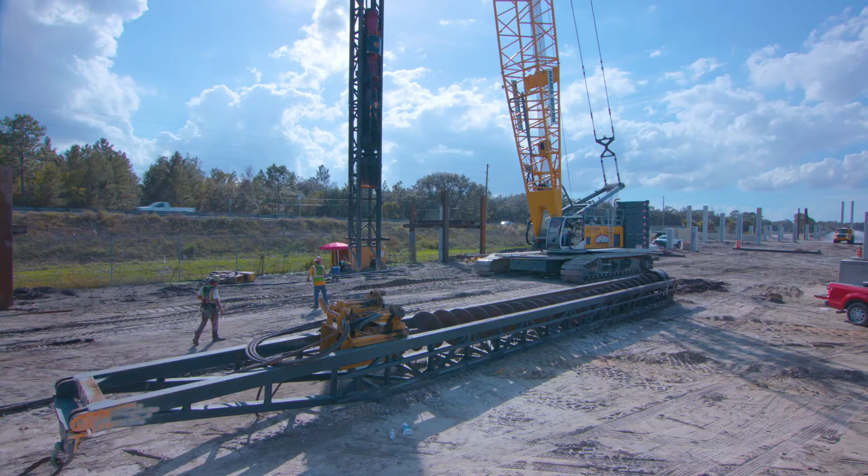If you have an idea making your job site safer, or a better place to work, we want to help. Indicate these ideas to your supervisor, safety committee, or superintendent. Every construction company and every construction site has its own safety requirements and preferences. However, the underlying message of our safety program is the same regardless of the construction market we are working in. Please be vigilant, be proactive, be safe.

You and the many families that comprise our company are what makes Superior Construction so successful. That is why it's so important for each one of you to look out for each other. Remember, our goal is zero incidents. You are working for a team who prioritizes safety above all else for you and the entire Superior family. It's what distinguishes us as a national safety leader in our industry.

I give you my commitment to providing the best tools and practices to create a safe working environment. For the sake of your family and our organization, I ask for your commitment to do the same.